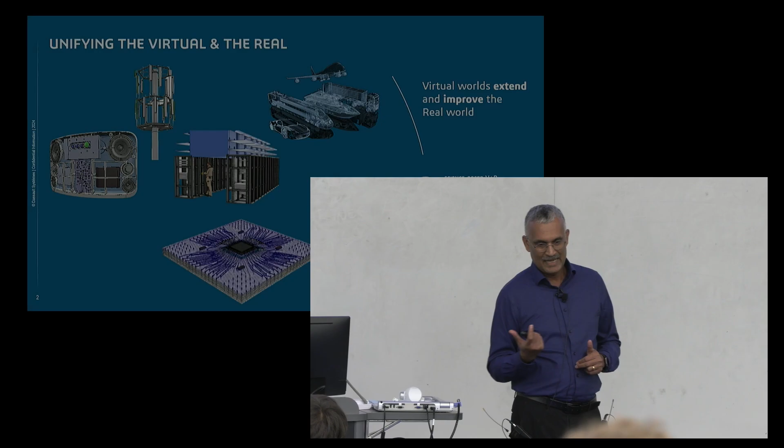I'm delighted to be here with you to talk about digital twins for semiconductors. I know you have had some introductions already on the physical side of semiconductor, be it design or manufacturing, how the industry works. And I wanted to talk to you a little bit about the digital twin enablement of this big revolution that is going on in semiconductor industry. And it's a very scientific based digital twin revolution that is going on.

And so I wanted to start with what we do at Dassault Systèmes a little bit to give you a perspective of the range of technologies that will make it happen. At Dassault Systèmes, we really start with the belief that the virtual worlds extend and improve the real world, right? And so that is serving the next generation of virtualization needs across all the industries that are underpinned by the semiconductor technology, and you have ultimately these connected multi-scale set of digital twins that are ultimately driving the next level of innovation there.

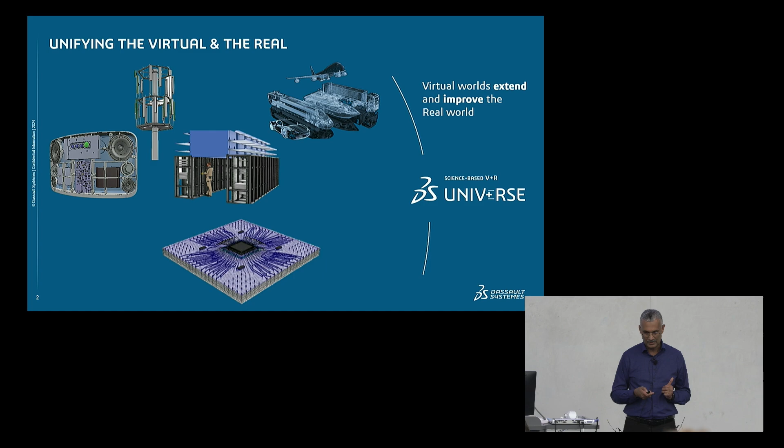So in order to make this all possible, at Dassault Systèmes, we have a platform, a digital twin platform. It's a scientific virtual twin experience platform that serves various domains of capability, from design to collaboration to simulation and manufacturing and data intelligence. And in order to really serve the larger industry, we serve 12 industries in manufacturing, from automotive, aerospace, high-tech, semiconductors, all the way to life sciences.

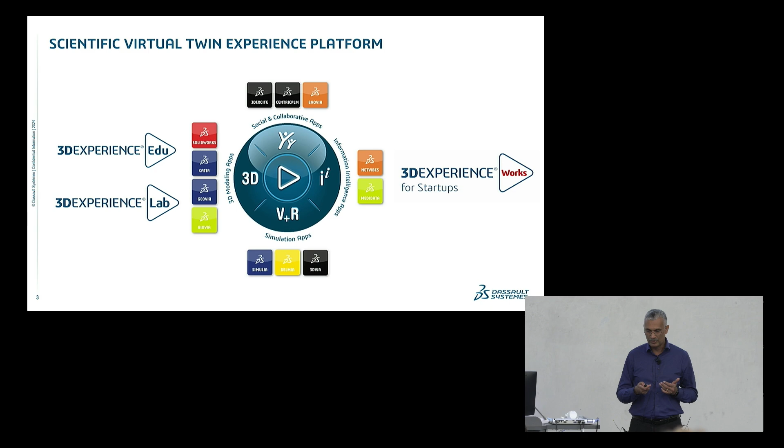But it's a complete ecosystem approach. So we do serve with educational networks, with the specific software offers, startup lab innovation accelerators, and also specialized assistance for hardware startup programs, with a turnkey software offer. So it's really a very connected set of capabilities that all come together on the platform to deliver the next revolution in semiconductors.

So a little bit of my background in semiconductors. It's fair to say I've been living and breathing the semiconductor ecosystem since last year with the advent of the CHIPS Act. Many of you probably heard about it, the big investments that are going on there. And as part of this pursuit, we are having this very integrated approach for virtual twins development. And even before the whole revolution in semiconductors with digital twins started to happen, I have had this intersection of experiences coming from automotive and aerospace, where the digital twin technology has been very advanced and mature.

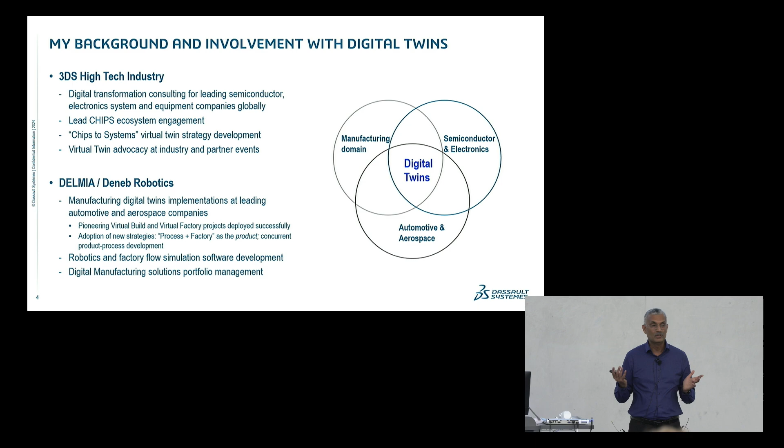If you look at the crash tests, or many kinds of other physical tests, that have been moved into the virtual realm, and also a lot of developments in manufacturing digital twin, virtual factories, or this particular focus on getting the integrated product and process right, and of late, semiconductors and electronics, with automation and robotics all coming together to that. So I'll be sharing with you numerous examples of what is digital twin. Again, there are a number of definitions possible, so I want to make it kind of conversational with you, to give you a glimpse of all that is going on there.

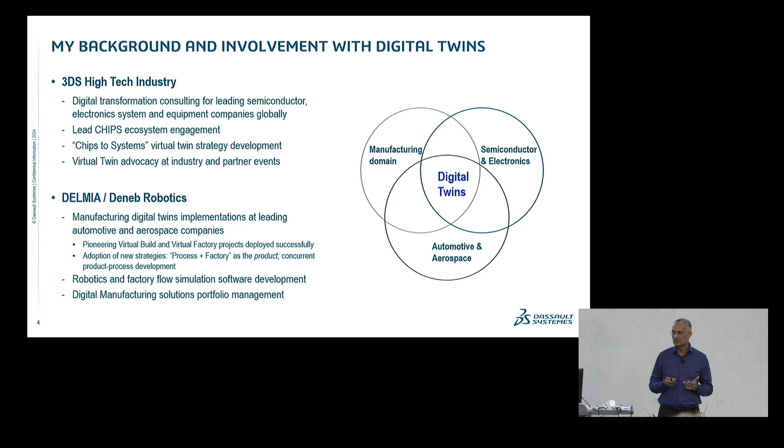And the great news is that this field of digital twins is just getting started. With this confluence of factors, call it a perfect storm, wherein the semiconductor industry, the chip makers, the foundries, they're completely rethinking the whole supply chain. There is a lot of focus on onshoring, reshoring. There are also very new kinds of semiconductor applications, for automotive, data centers, and life sciences. So this focus on system level solutions is also increasing the complexity.

Workforce of the future. With the interest you are taking, you are going to be entering the workforce with potentially new roles and new personas that don't exist today. It's not just about AI and cloud, but many others. And then we have the thrust from the government, wherein there have been specific programs that are being launched. There is a dedicated digital twin institute for semiconductor manufacturing. One recently launched was the AI Institute for Resilient Manufacturing.

And then just yesterday, another $100 million program was announced for AI and autonomous experimentation for sustainable semiconductor materials. And this is all gearing towards this need to transition successfully from the lab to fab, nurturing the innovation process, which often gets stuck because of the prohibitive cost of manufacturing and also the time it takes to transition it.

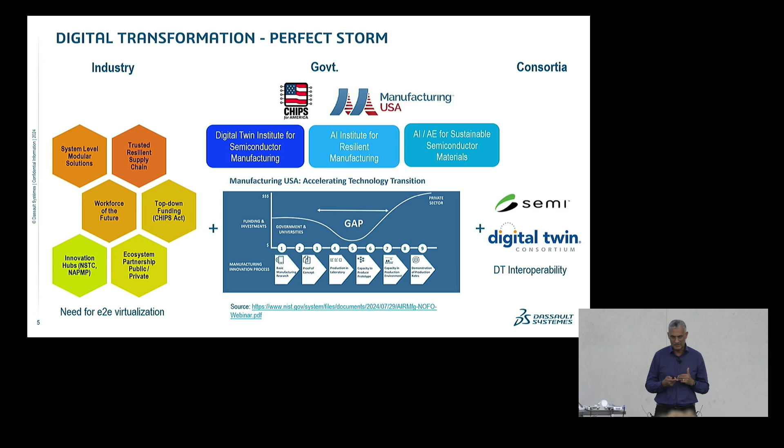So it's really a very interesting time to be into this subject. The first chapters are being written, but the book is still to be written. And the three big pillars that are really in front of us are in terms of building the workforce of the future. There is this focus on process experimentation. How do you scale the processes and accelerate the innovation, and then sustainability, right? And how do you enable that through digital twins?

Again, there are a number of definitions, and this is beyond this discussion to get into that. But if you look at the whole evolution of digital twins, a lot of early efforts started with 3D models, models of the fab layouts or equipment, and performing general simulation, mechanical or electronics type simulations. And then we started to have the data connectivity thanks to the IoT and the cloud platforms, more sophisticated multiphysics, combining various phenomena in mechanical with electrical and electronics phenomena.

And now with the democratization of AI, we have this third phase, if you will, which is a combination of hybrid digital twins, combining first principle physics that you are all going through, as well as machine learning based on the data that is starting to come back from the semiconductor fabs as well as test sites, and having this bidirectionality between the two: the physics augmenting the machine learning algorithms, and the machine learning helping improve the physical results. And then eventually this digital twin affecting the actual semiconductor manufacturing process in a predictive way, and to be able to control that.

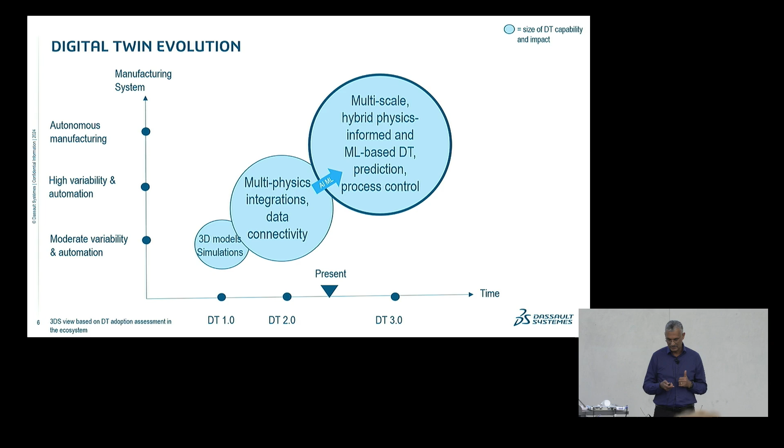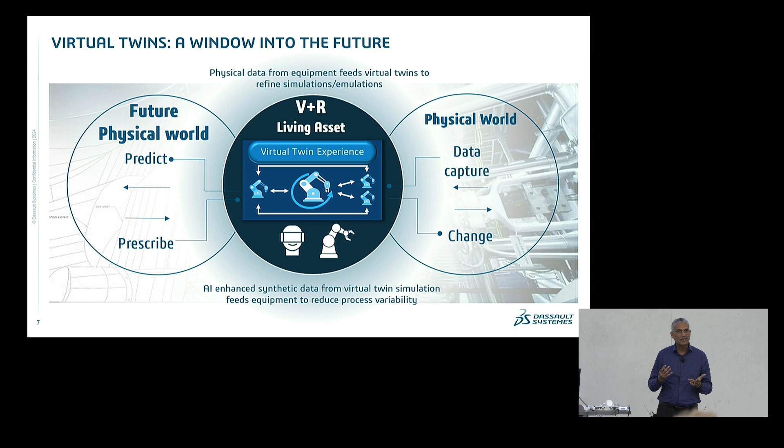Right? Just in a nutshell, there are a number of variations of this theme of what is a virtual twin or digital twin. But at Dassault Systèmes, we specifically talk about virtual twins because often you have certain objects that are modeled, simulated, and experienced even before the physical thing comes into reality, right? And so throughout the course of that product. So it's important to think of digital twins even before the physical thing exists.

But in a nutshell, we have this combination of the virtual plus real. So from the physical entity, an equipment or sensors, you capture the data, and then combine that with the various types of behavior models, different types of physics, and then be able to simulate, learn from that data, and then affect the virtual, what is going to be the future, right? And essentially having this bidirectional loop of AI plus physics, complementing each other.

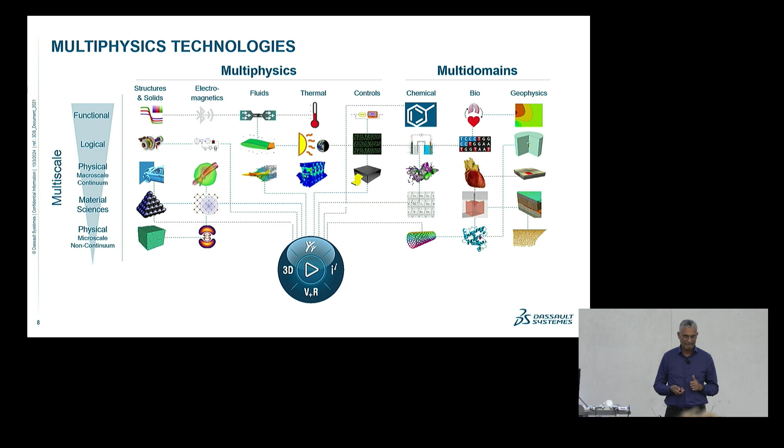Same thing for materials. Materials is going to completely change the whole semiconductor device designs as well as manufacturing process. And so with the modeling and simulation technologies that are available now, you are able to predict the properties of the new materials. You can validate if the materials are going to actually perform as they are expected. And there is this continuum of material chemistry, so atomic level, molecular level, and then the discrete element, and then component and all the way up. So think of digital twins from the scientific angle: material science, chemistry, and physics all together, right?

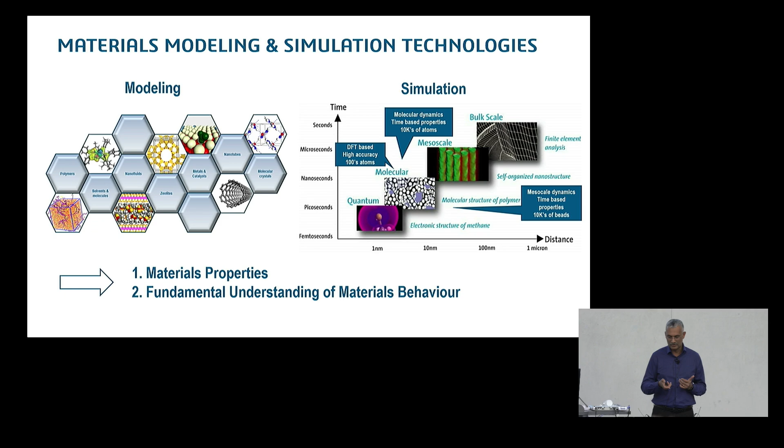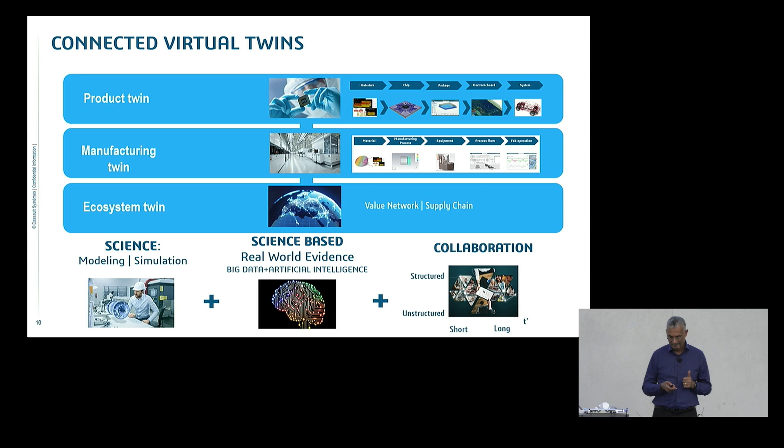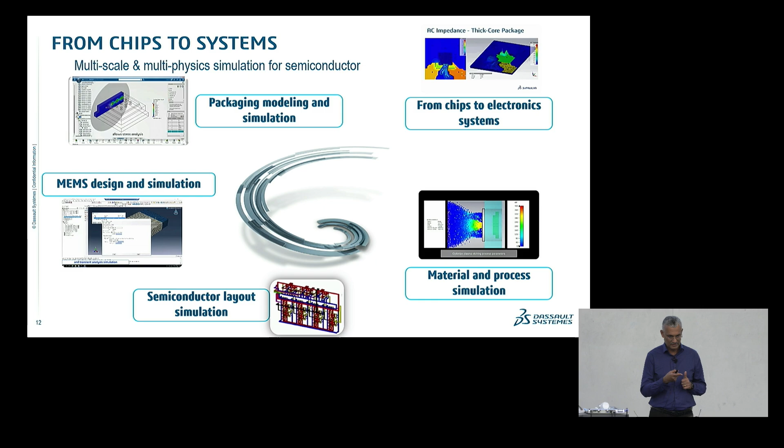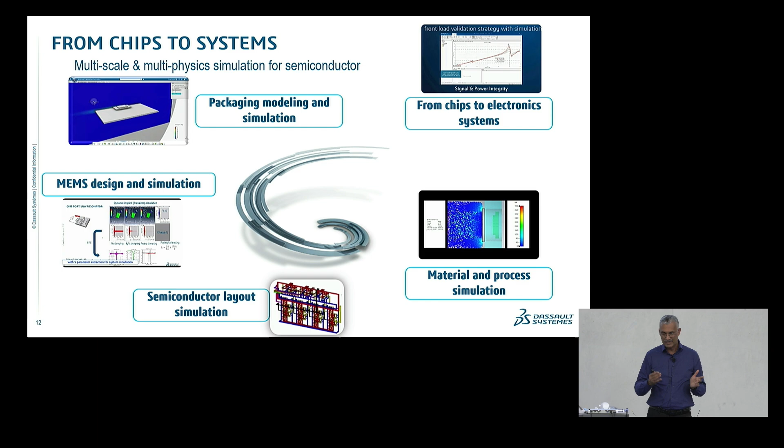So then just moving into the product twin examples. We talked about going from materials to the semiconductor design. Then at the package level you may have MEMS. MEMS are the different types of sensors that are put on a semiconductor package. Then there is the whole package design, and finally taking the chip and putting that into the actual electronic system.

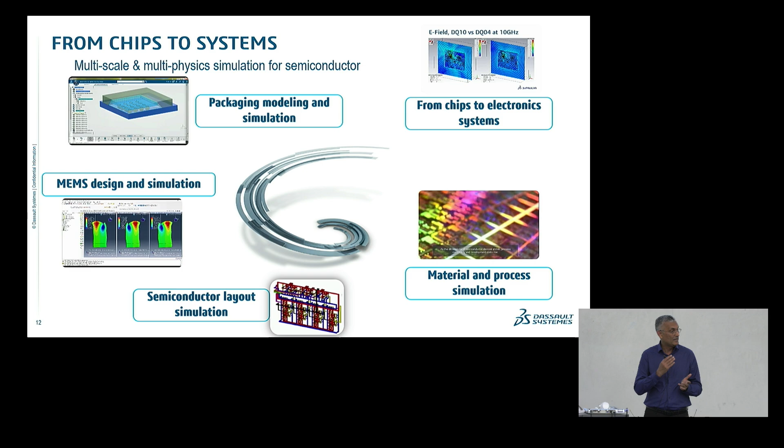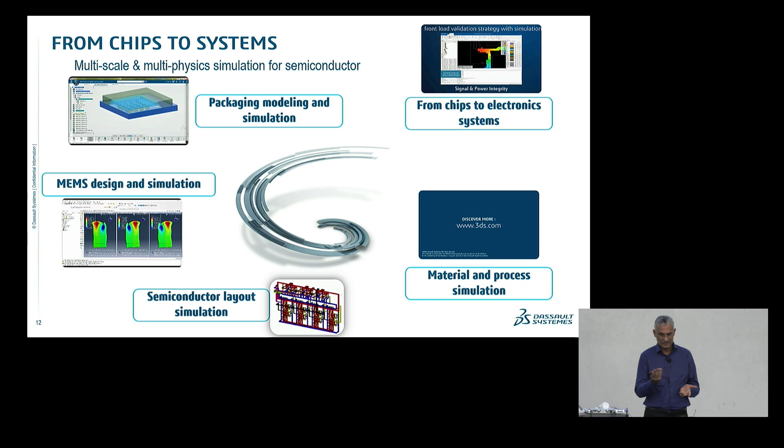So for all the performance of the chips, whether it is electromagnetic interference, thermal management, or structural issues, there are all kinds of physical phenomena. And now with chips being part of not just our phones or general consumer devices, but also very mission-critical environments like airplanes and cars, there is an ever-increasing amount of simulation and modeling that has to be performed there.

So then moving specifically into the package. You may have heard about advanced packaging. It is really a big thing, wherein you bring in very heterogeneous chiplets of different functionality, and then they're integrated. And so that is, again, increasing the level of sophistication and complexity.

So there are a lot of thermal issues. There are reliability issues in those packages. Again, signal and power integrity, fatigue, vibration. I mean, just an unprecedented amount of phenomena to look into.

And the traditional approach is always, hey, I'm going to just create some prototypes, build those prototypes, test, find issues, come back, redesign. That cycle is just too expensive. And now we have these models that are allowing you a level of fidelity so that you can avoid these physical tests.

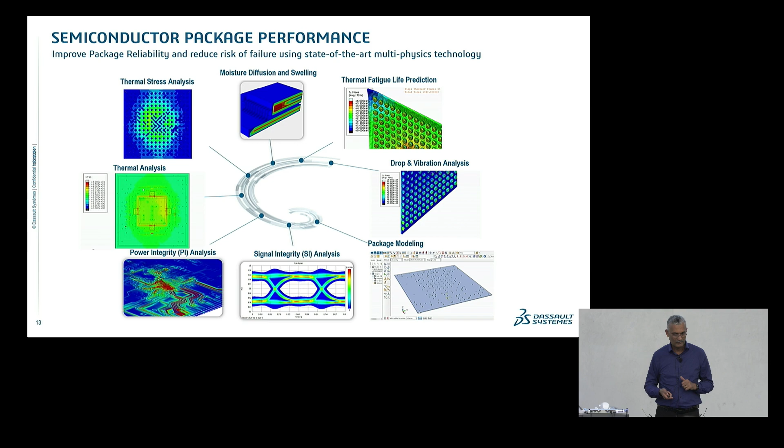Okay. So moving on to manufacturing. Again, similar thinking: think of digital twins not just as discrete, small projects, but to get the true value, this connectivity from materials. This time in the manufacturing process context, there is a large number of processes that are performed on a wafer to completely fabricate it. And then there is the packaging side of the process also.

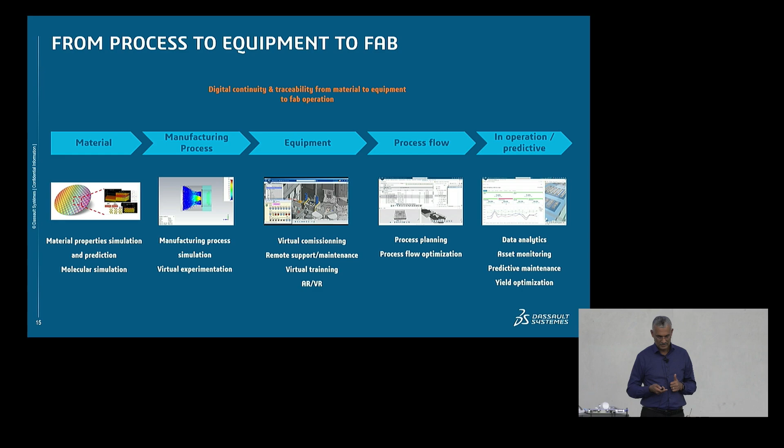There is equipment, again, very, very costly capital equipment, $100 million upwards. And then you have to establish the whole process flow and put that in operation in the fabs. So I'm just going to go through some of the examples here.

One thing that I will pick up here is atomic-level modeling and simulation, which allows you to understand the material structures. There is physical phenomena always going on. There are material testing and material research labs, wherein all this testing is happening. And again, the idea is to shift left with virtualization and accurate models so that you can predict the behaviors, and you have a lot more in the virtual space, a spectrum of possibilities for trade-off studies and so on.

There are very specific examples. For instance, in atomic layer deposition, you have quantum modeling effects that can be studied. There is also the specific example of a silver surface with QMD, quantum molecular dynamics. The field is just opening up for semiconductors in terms of digital twin enablement.

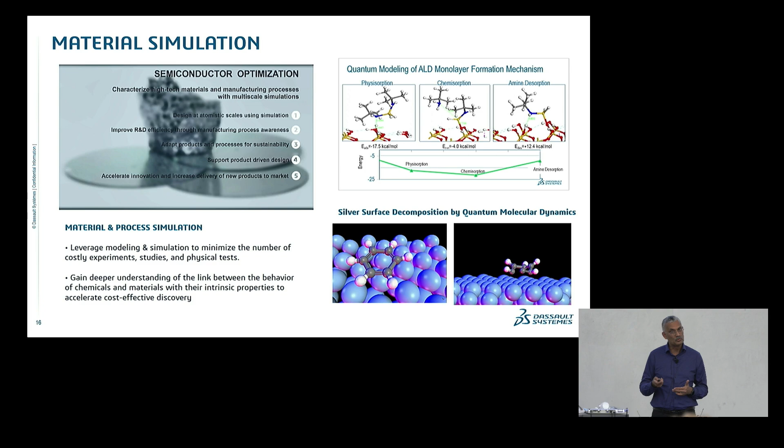So then moving on from materials to the fabrication process. This is just a very simplified representation of some of the processes, where with modeling and simulation you can predict the behavior of these processes: deposition, lithography, etching, ion implantation and doping, and CMP or planarization.

These are processes that take a lot of time to converge because of the extreme variability of the process. Even if you follow the exact same recipe, you may or may not get the results. Therefore, it's often much more economical to perform these virtual experiments using digital twins.

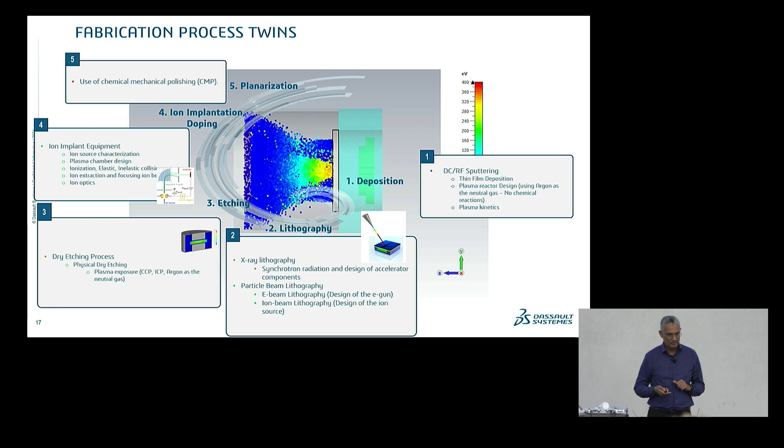Okay, so I'll take one specific example of a process here. It's called the CMP process. You can see the kind of behavior you can visualize using the simulation models. And this is the case wherein there's significant wear that can happen on the pad and the silicon wafers. That all can be predicted.

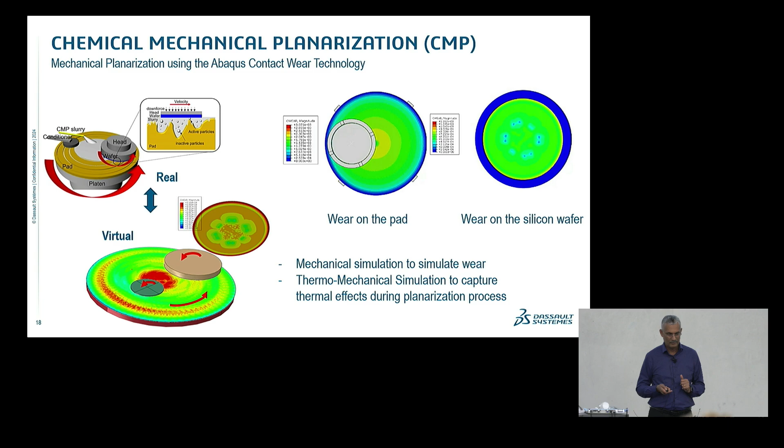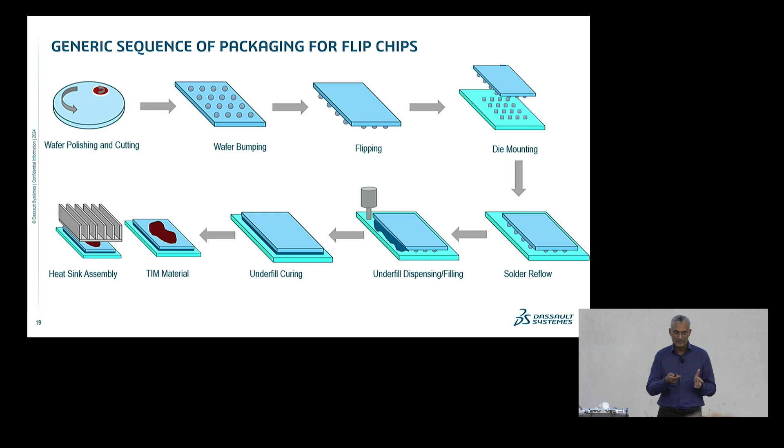Okay. Then moving on to the packaging part of the process. Again, this is a very simplified representation of one particular type of package. So what if, again, we can simulate some of these processes, capture the behavior, and predict the performance ultimately. Okay. So a lot of multiphysics. Thermal is, again, if you have one takeaway from some of these examples, thermal is a big issue. Thermal interface materials on the packaging.

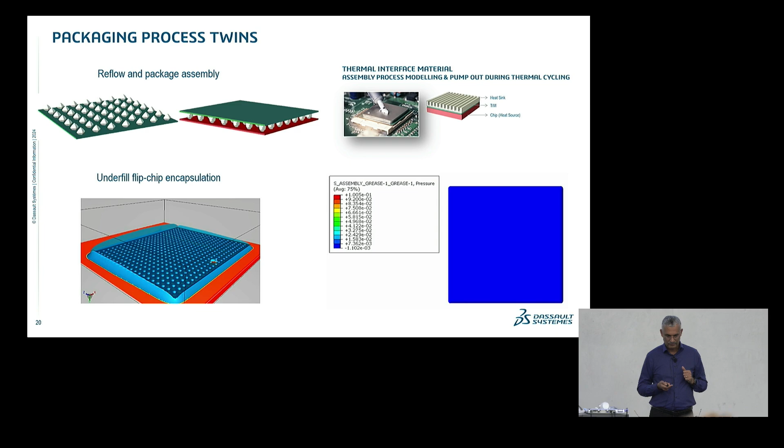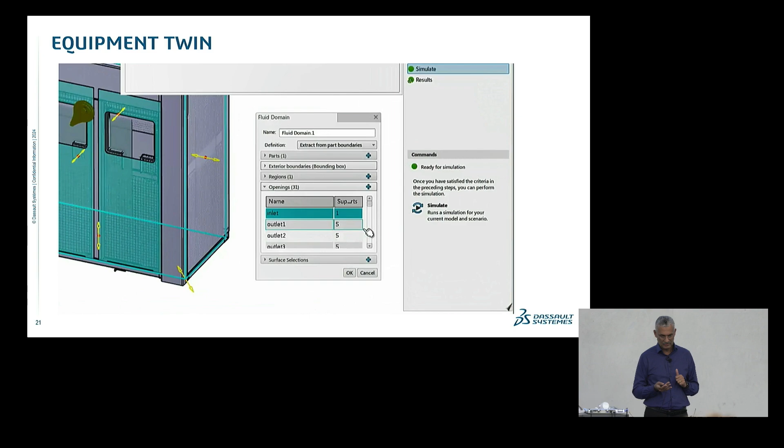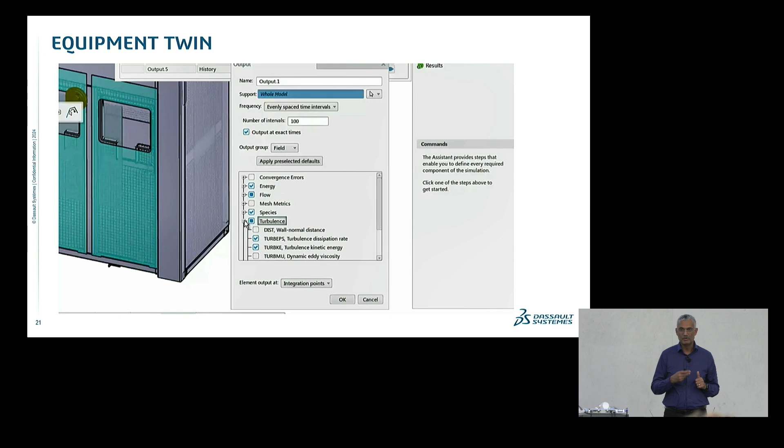Okay, so from there, let's move to equipment. So these are again many different types of digital twin studies you can perform on the semiconductor manufacturing equipment, right? This is one example wherein from an engineering and validation perspective, you can run multiphysics studies on the process behavior that is going on inside this equipment, conduct the design of experiments, even optimize that before you start to build the prototypes.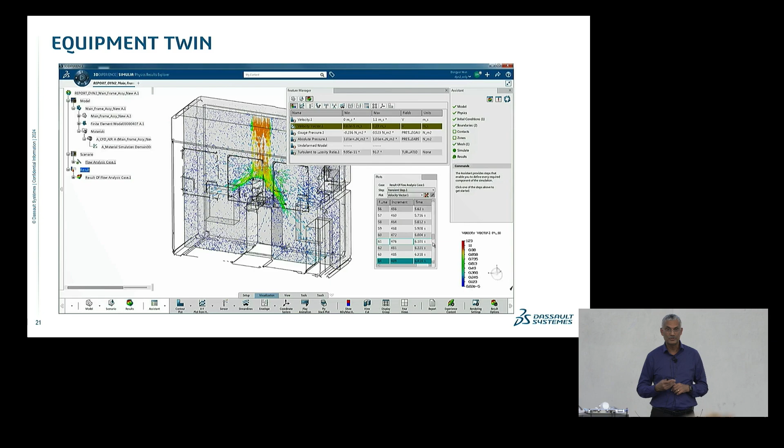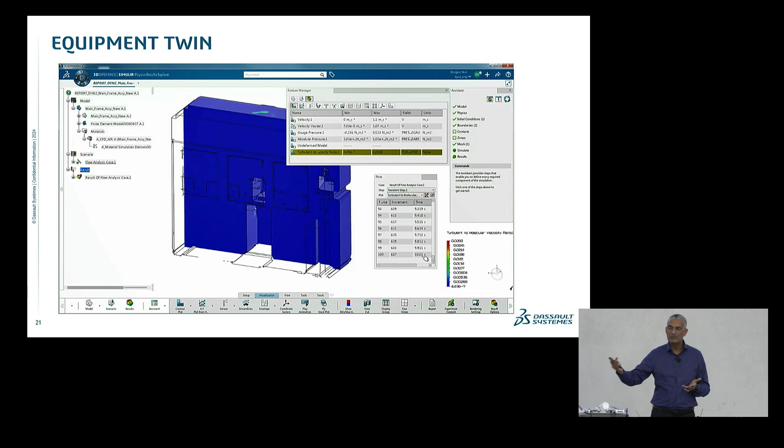And after that, there are again a number of use cases wherein you can use that equipment model to build work instruction, how to build that equipment, or if you want somebody to service that, diagnose issues. How do you go about disassembling and analyzing, diagnosing issues? So the idea is you create these twins once, and you use them many times, not to have to create one for each specific application. So this is the approach that the industry is moving towards.

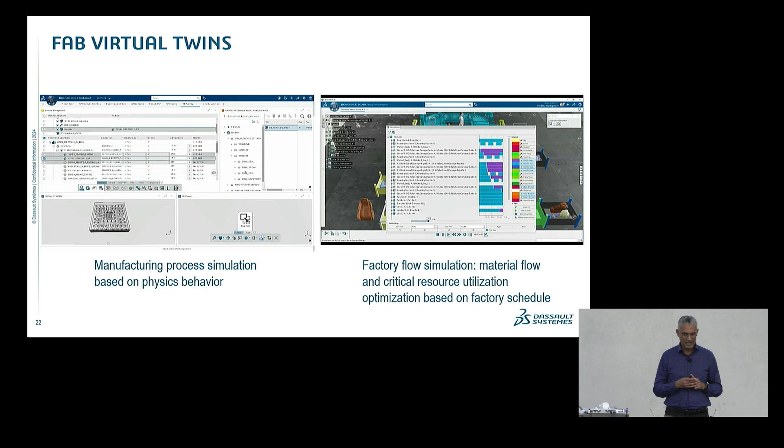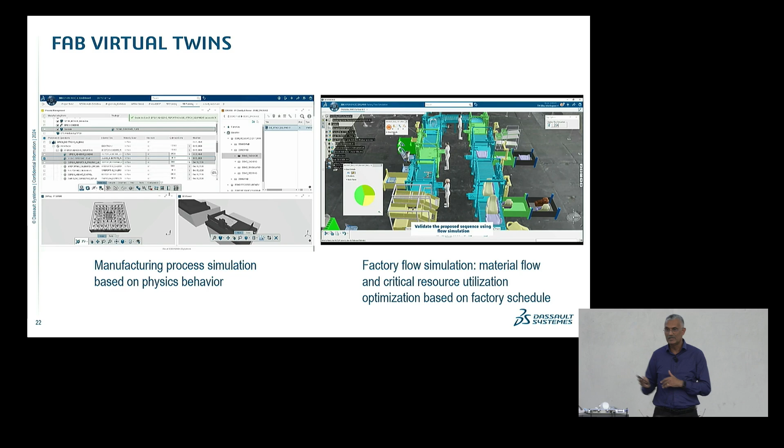Okay, so then moving on to the next level, which is at the fab. So one example is that you have built a process on a particular equipment, and you build a complete sequence of the processes, and start to predict how the process will behave, right? Using the same 3D and physics, and the sequence of the process. Before you actually go and commission that equipment, think of this gigantic equipment, very expensive. You don't want to take time going and doing trials in the fab, right? You want to validate as much as possible in this virtual space.

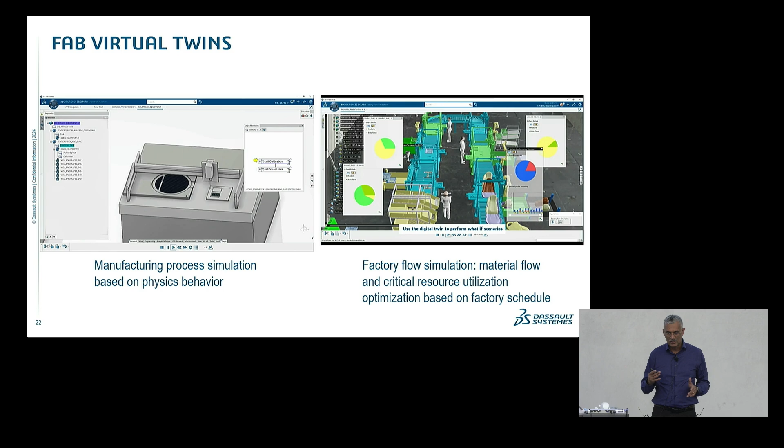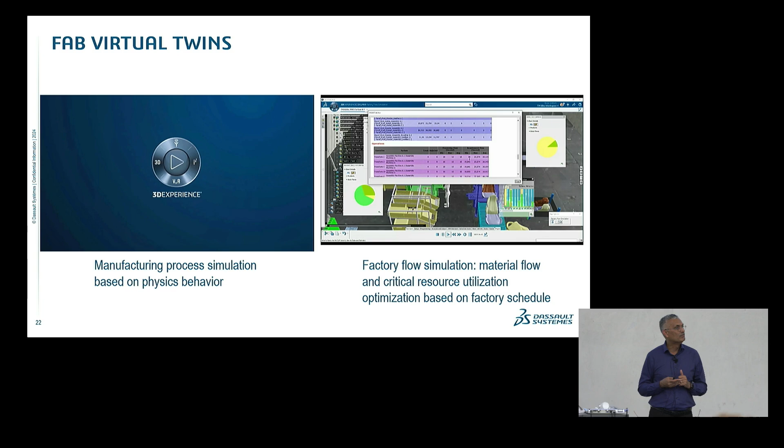The other example is the factory flow simulations, right? So having built these unit twins, you have had unit twins of the fabrication process, the packaging process, you have had twins of the equipment, right? And then there is the whole infrastructure that is supporting a fab. It's not just the clean room. There is the whole sub-fab, wherein you have all kinds of critical equipment that is supplying ultra pure water, the quality of the air, ventilation, and so on. And so then you build this kind of fab level virtual twin, and you can perform many different types of studies there.

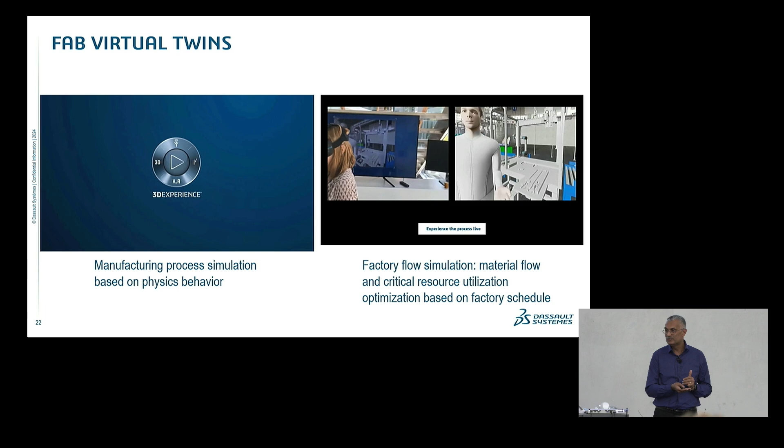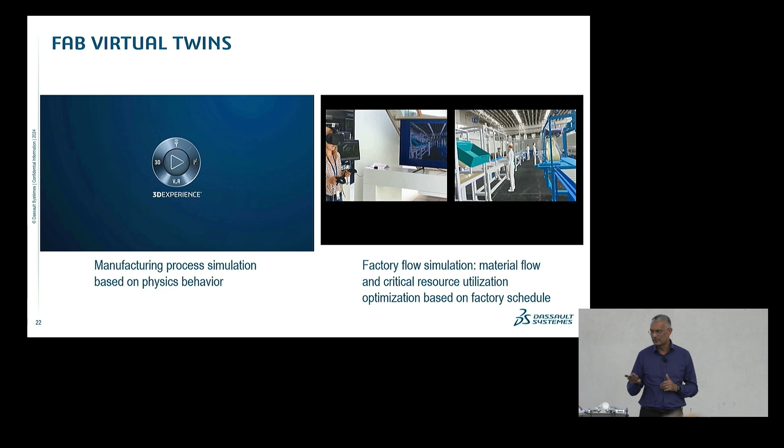You can study the flow of the wafer as it flows through. There are certain automated material handling equipment, so what if there is some blockage on a particular equipment that stops the movement of the wafer, right? And then completely optimize this flow, since in the same fab you can have many different types of chips that could be produced. Gone are those days wherein you build the fab just for one thing and keep on doing it. Now the diversity is there. So there are many different scenarios that can be enabled if you have this kind of a more complete definition.

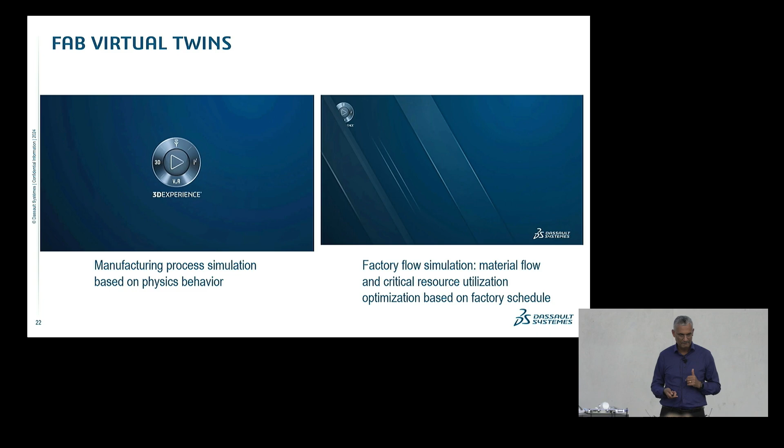Okay. Then I want to talk to you a little bit about the different use cases based on these same models that we just looked at from an industrial engineering or process engineering perspective. Could we reuse them for virtual education or new workforce development? There's a prediction that some 67,000 roles might not get filled by 2030, and many of them are either research engineers or manufacturing technicians. So this becomes crucial to enable that scaling through digital twins, right?

So I want to talk to you about the partnership Dassault Systèmes and Purdue have had. I was here one of those days last winter, wherein with the semiconductor task force here, we envisioned this idea of working with the Birck Nanotechnology Center here and starting to build a virtual replica of that.

And so, of course, it's a big undertaking, but we have been able to put together a pretty interesting, compelling showcase there of a portion of the Birck center, wherein you have not only the layout but also a particular equipment with its models, the process on it, and what you see there is actually the digital twin of that particular portion of the Birck Nano Center.

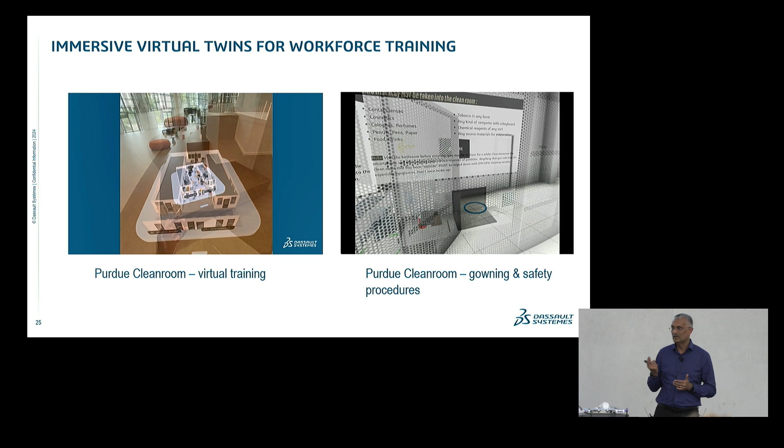Then so we continue to work with Professor Zhihong Chen and the team at Birck. So on the left you see.

My name is Tim Miller. I've been here for 42 years doing this or something like it.

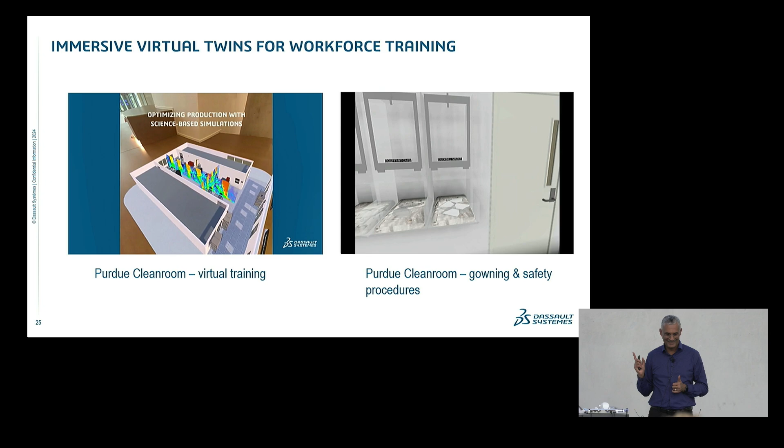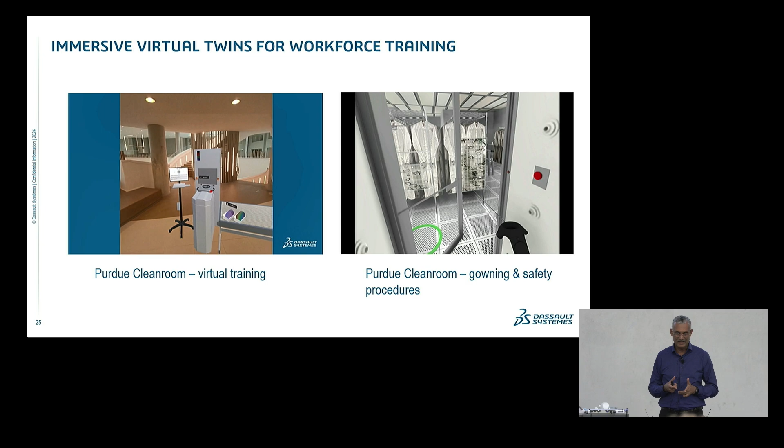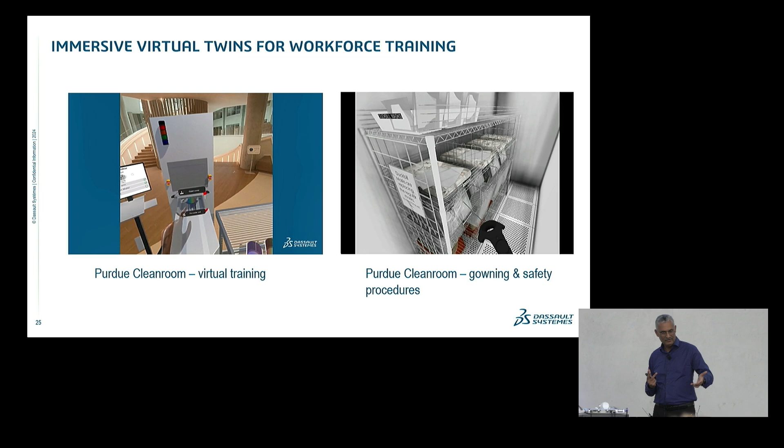Okay. So this is actually a portion of one of the Birck specialists who is giving instructions. So on the left, by the way, is what you see through the Apple Vision Pro, right? And next time I think we'll figure out a way of bringing it here so you can experience it. It completely changes your perception of the whole digital twin, and you can enable training, simple training on equipment.

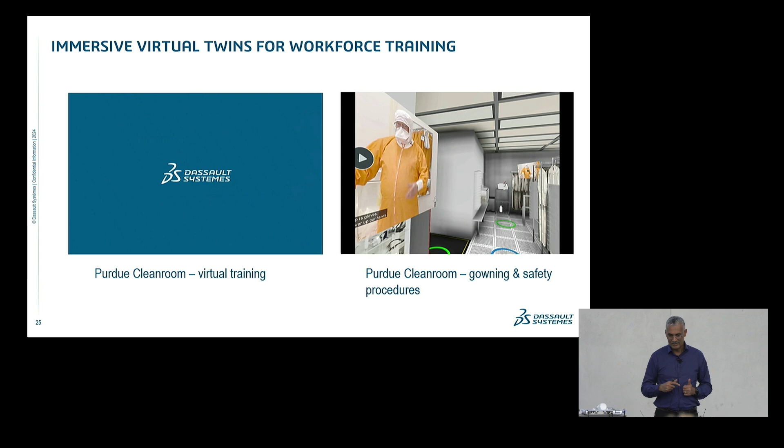On the right side, you see the gowning and safety process. So if you have been to a clean room, again, it takes a while, right? To go suit up in the bunny suit and go through the whole safety procedure. So the idea here, and then it's a facility that's a precious resource, right? So at some point, not everybody may be able to access that.

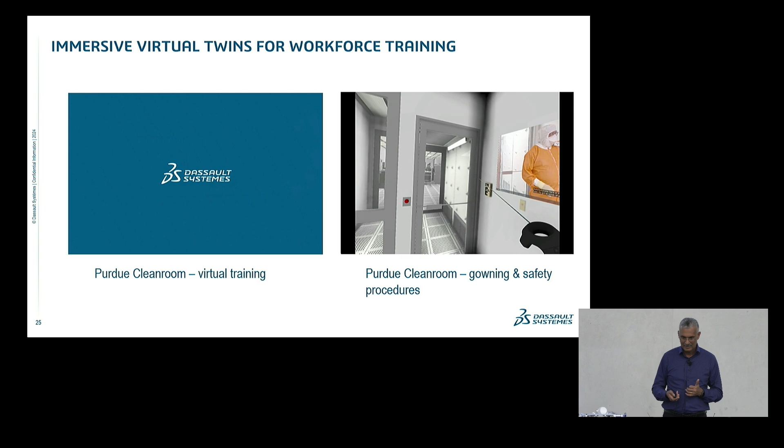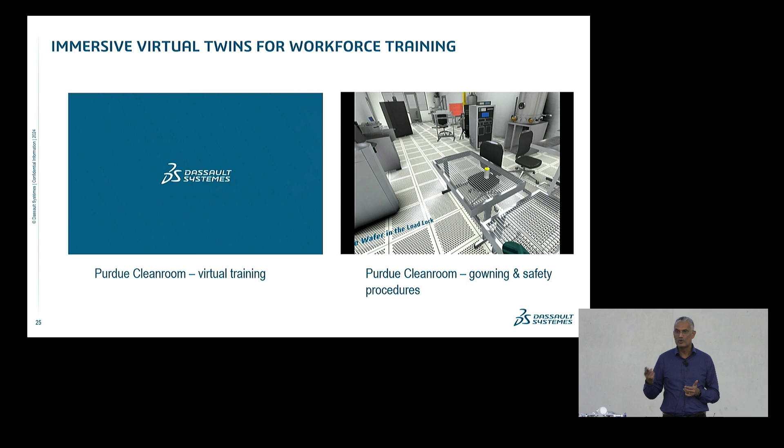Yeah. So the idea is to do this training virtually and then enter the clean room, right? And that way, the idea is that the onboarding time, from what takes 2 hours, could be down to 15 minutes. I mean, think of it like you can have 10 times more students actually accessing this.

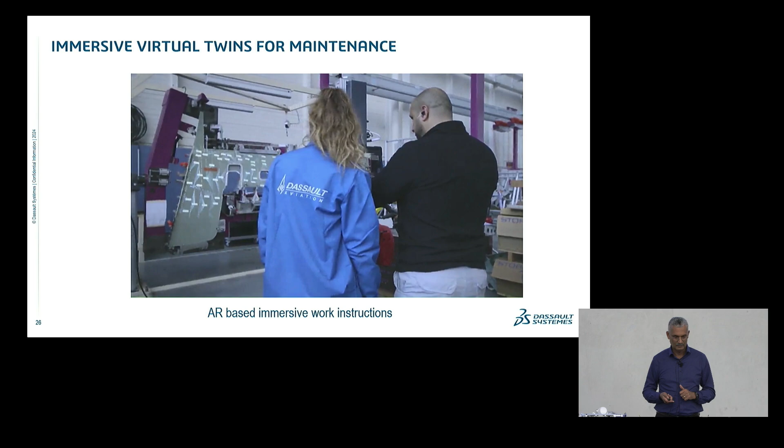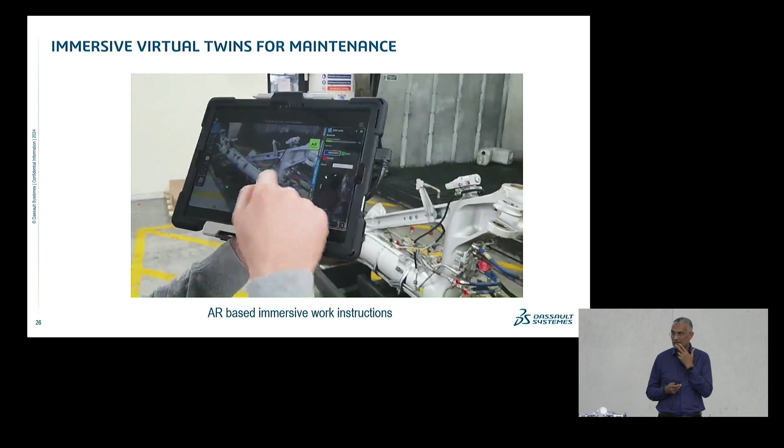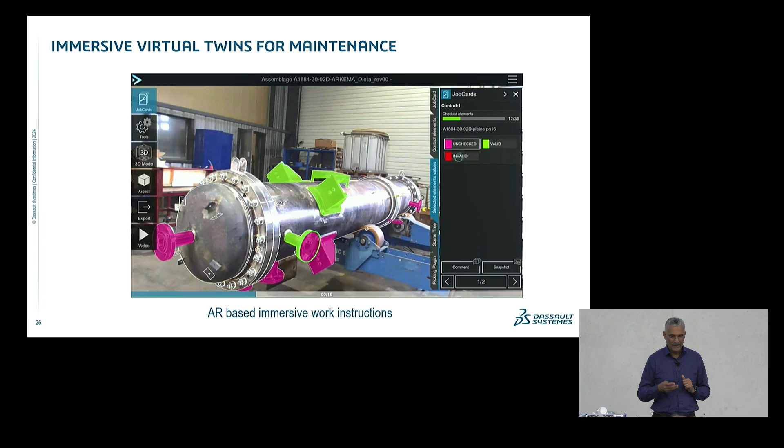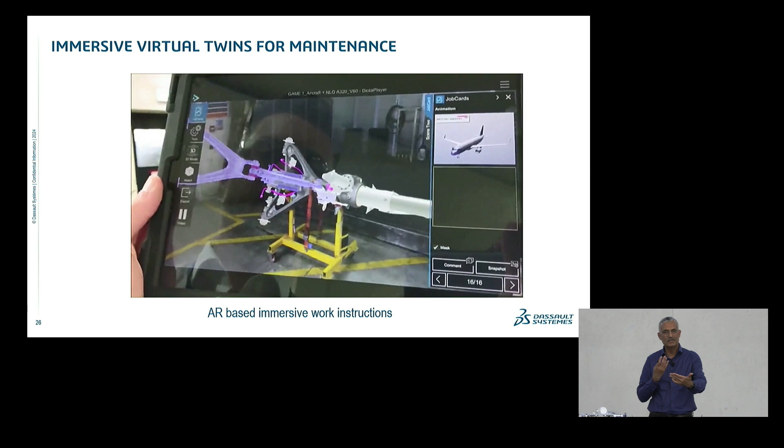Okay. Maintenance, right? We talked about that equipment, the capital fabrication equipment, very, very expensive. Even an hour of unplanned downtime can translate into millions of dollars of production loss. So this is not a semiconductor example, but the idea is once you have a digital twin of a particular equipment, and with AR VR technologies, you can actually augment what you see in front of you with work instructions that are very precisely oriented. So you get situational awareness and are able to perform the job much quicker and more accurately than otherwise.

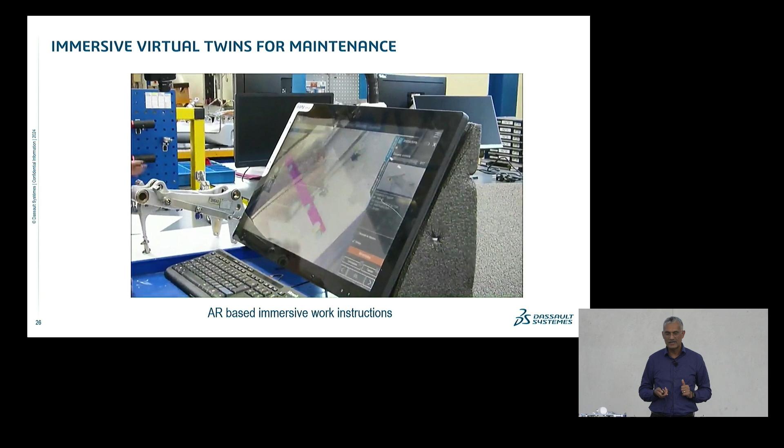So the same idea extends into trying to maintain semiconductor equipment or diagnosing the root cause issue.

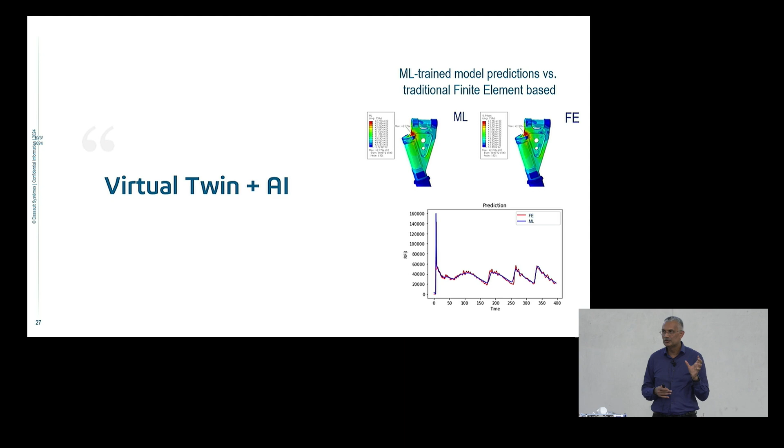Okay. We have to talk about AI, and AI is going everywhere, but it's also going into the digital twin space. There are a number of things to talk about, but one thing I wanted to talk about was this augmentation of the physics models that we saw up until now with machine learning, right? So this whole new discipline that has just come up is called surrogate models. You've got to check it out. It's fascinating. Surrogate models is the AI for engineering, simply speaking.

So the idea is, well, you do simulations, okay? And the simulations, on one hand, are very accurate and reliable, and if you put the right people, you can predict the results and get the job done. But they are computationally very expensive, and they take too long, hours sometimes, depending on the particular physics. So what if you can use machine learning so that it will learn, or find out, reduced order equations of physics, reduced order models? And with that, you can run much faster and much more economically.

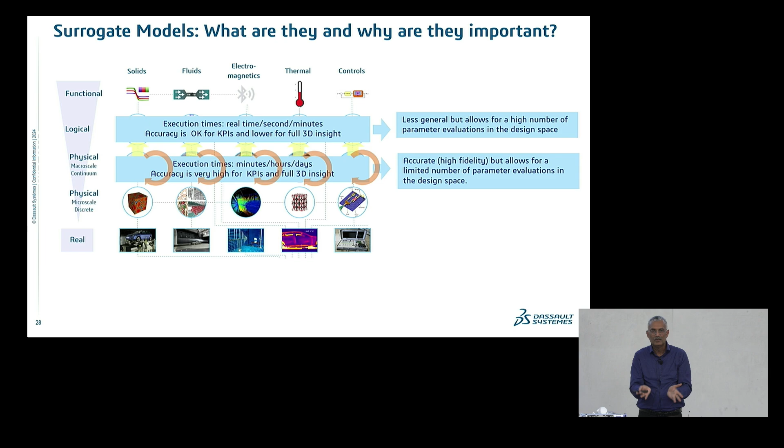So there are, again, a lot of investigations going on in terms of what is the best fit for surrogate models. You can do this for design space exploration, very quickly. There are a number of design choices, whether it is chip design or board design. How do you narrow down that funnel of possibilities with surrogate models?

Okay, so there are a number of use cases that are demonstrating very impressive results. The surrogate models do as good a job as the physics model in terms of this very early elimination of design alternatives, but it's computationally very, very attractive.

So one example related to these use cases is about deformation. The study was done on the mitral valves, which are as complex geometrically as semiconductors. One study showed that if you do the regular simulations, it could take some 20 CPUs and it takes 3 hours.

But if you pass the simulations through surrogate model learning, say 500, 540, enough iterations of learning, then with just one CPU, within a fraction of a second, it will give you results that are as good or close enough.

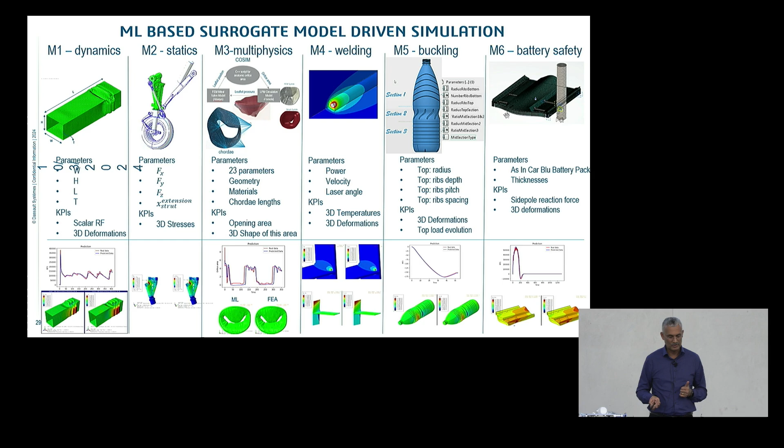So this is the revolution that AI is going to bring in semiconductor, be it chip design or manufacturing process design. Okay. You're studying changing the world with chips, and we need to approach it sustainably, right? So I want to go back to the materials aspects here, sustainable materials. This thrust on getting the materials right.

PFAS, some of you might have heard about. PFAS are polluting the environment quite a bit, and they have become pervasive in semiconductors over time because of their usefulness. But now the time has come to identify alternatives. So there are, again, simulation modeling technologies that make it possible.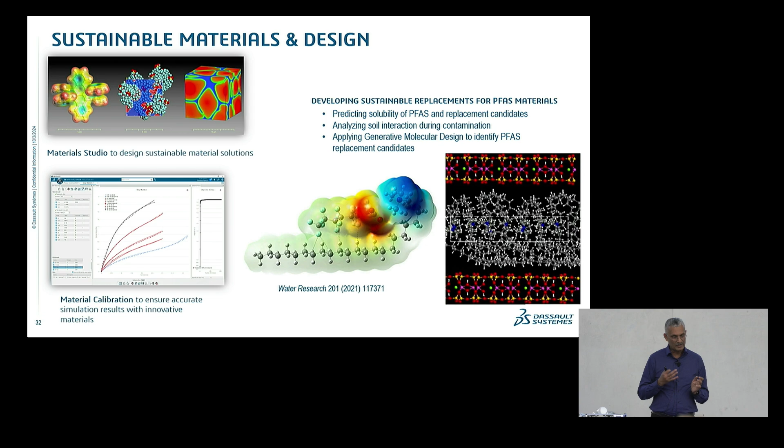Also, calibration, right? So how can you rely on all this? If you were to skip the physical test or physical verification, you have to have a certain trust in this digital model. So calibration is very important, so that you can trust that the right or optimal properties are actually being used in the simulation.

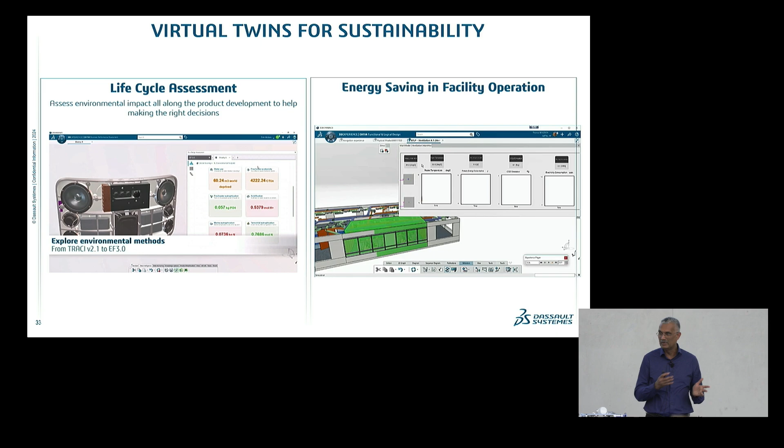Okay. There is this whole discipline around life cycle assessment, LCA. This is an example not of a chip, but the chips and many other technological components placed in a consumer device. And so you have this life cycle approach of what if I change one process for another? What is the impact on carbon, energy consumption, water consumption, or waste?

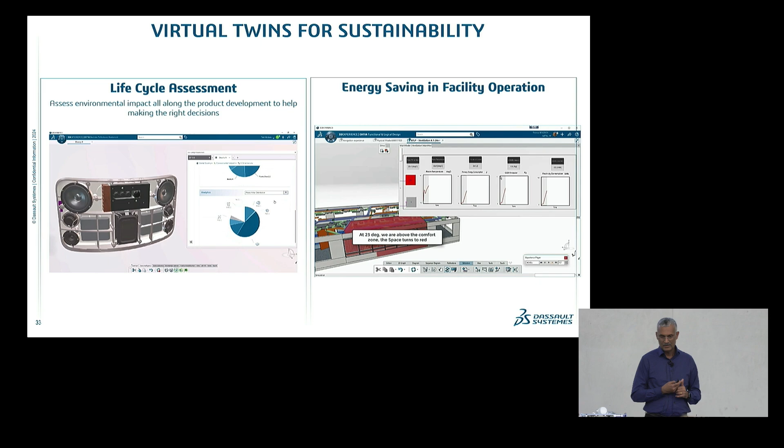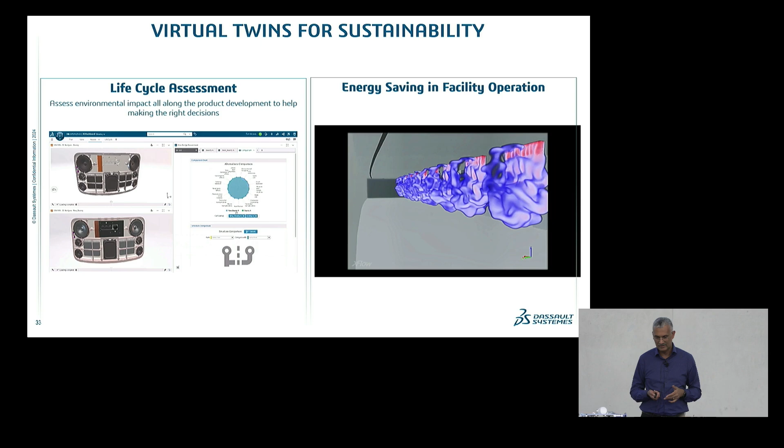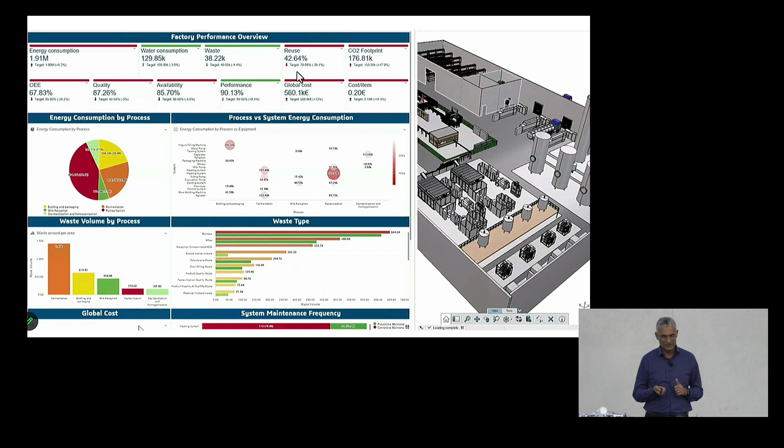And you do this on a product level, but you can also do this on an operational level, be it a manufacturing plant or otherwise. So this is a facility in operation, data centers or manufacturing plants. A lot of the sustainability impact actually comes from manufacturing. So there are digital twin technologies that can help here. This is just one visual of the factory performance, but from a sustainability standpoint.

This is an idea that is currently being explored with the Birck Nanotech Center. What if we make the equipment sustainable, net zero actually, by having good visibility into its energy consumption or the kind of gas emissions or other waste that goes on there, doing it at unit level and then cascading it up to a lab level, and what if we make the lab carbon neutral, for example. So digital twins for sustainability.

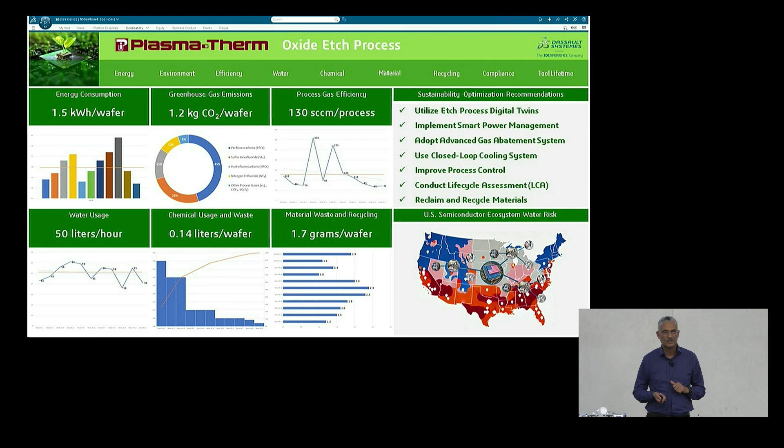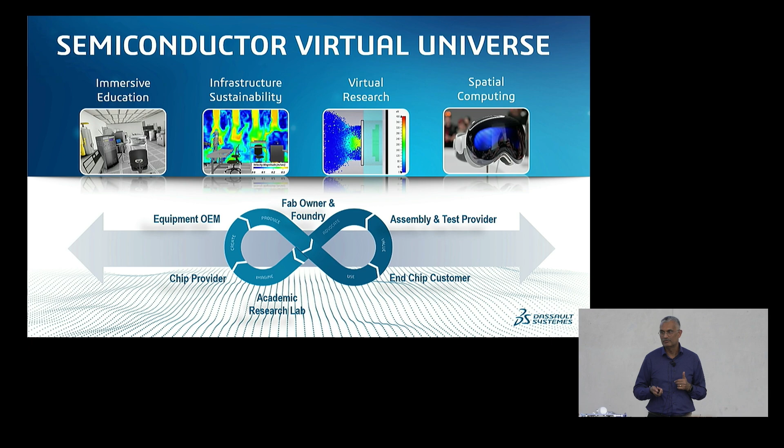So I just wanted to leave you with three takeaways. If you are already in this class, you're intrigued by semiconductors and possibly by digital twins and digital technology, what's in store when you finish your advanced education and want to get into the semiconductor industry? So one thing I see is that this has really become a multi-scale system world. It's not a chip standalone, right?

And it's not just understanding the physical design or physical process of chips, but it's also understanding in totality the integrated aspect of virtual plus real. Because virtual is like a distinct set of technologies we just saw, the understanding of physics and materials, data science, plus the understanding of what is in the physical design and manufacturing. So the system world is critical, all the way up to the end products.

You have to see what I'm designing or building is going to do in the product or system that it is going to be placed in. And by the time you join the workforce, industry, academia, or otherwise, there are going to be new roles. I mean, we cannot even anticipate. We're just starting to see there is a need for digital twin architects, system engineers, who are multi-domain.